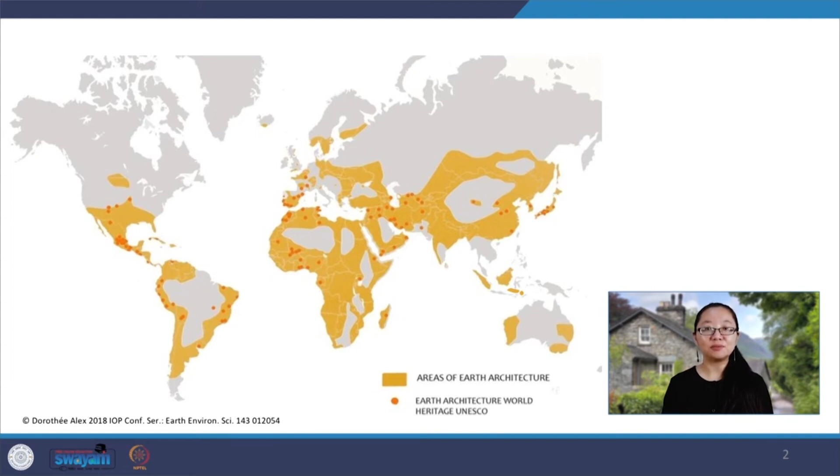When referring to earth or soil in building construction, both terms mean the same materials. Earth has variations of color, texture, and characters depending on the soil content, geography, and climate. As can be seen in the picture, soil in the tropic and desert is different. The World Soil Museum in Wageningen, the Netherlands, showcases 100 earth profiles from more than 90 countries in the world. The display represents the 32 major earth groups and the variation of earth within those groups.

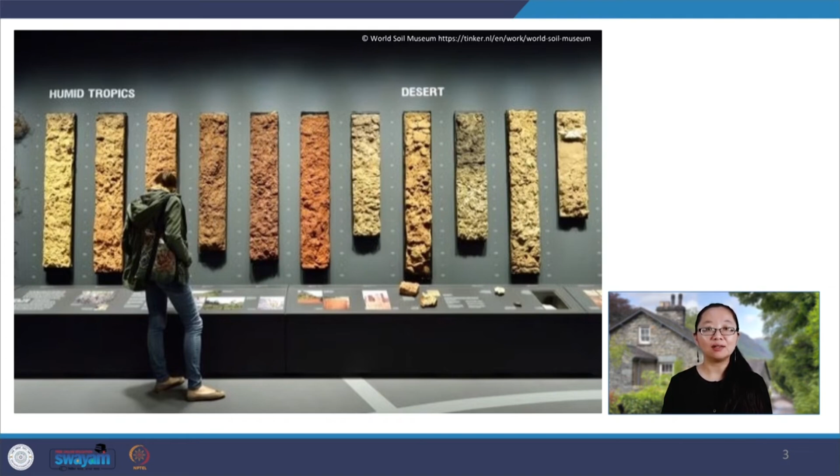Each of these soil groups has different content which affects its color, texture, and characters. Some are softer, stickier, or clayey like mud. Some are harder, rockier, and drier. Based on those different earth qualities, climatic conditions, as well as local knowledge and technique, a variety of techniques are developed. With these techniques, different cultures use earth to create many buildings, not just homes and dwellings, but also religious buildings, fortresses, and palaces that have stood the test of time.

The first construction to be discussed here is the dugout technique, which falls into the monolithic construction where one uses only the soil. Earth is dug out of the ground to create underground shelter. In most cases, this kind of dwelling occurs in zones with arid climate and with soft yellow earth that is easy to dig into, but also has a high capacity to maintain the standing posture and is less prone to collapse even without support. Moreover, the arid climate is in favor of the soil to keep dry and rigid, which improves the service life of earth dwelling architecture.

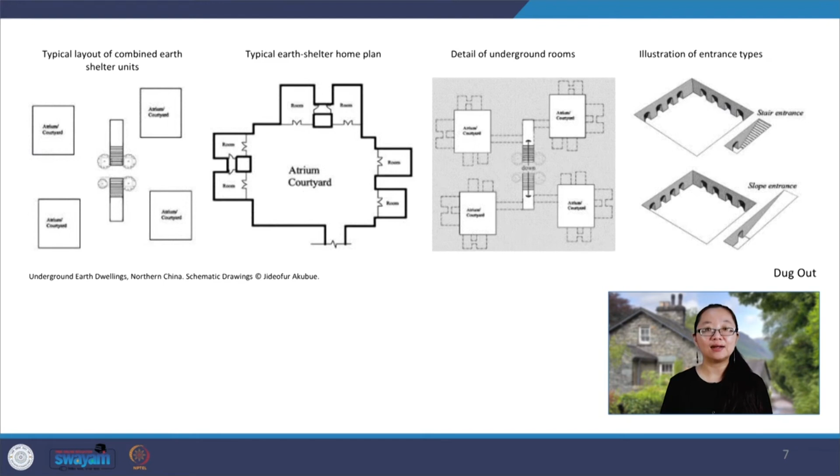The client wants a family home that makes as little impact as possible on the surrounding environment, both visually and environmentally. So the architect responds with a half-buried residence in the contours of the hillside, with a roof of meadow grasses integrating it seamlessly into the surrounding moorland. Designed to consume less energy than it generates, the house generates renewable energy on site, powered by a ground source heat pump, photovoltaic panels, and wind turbine. While it's far from a traditional home, the architect proposed to build it with traditional construction methods and locally sourced materials. The structure has already been selected as an exemplary project within the UK government's Planning Performance Agreement for renewable and low carbon energy schemes.

The second one is rammed earth technique, which also belongs to monolithic construction. This technique is basically making use of simple tools to compact soil in order to produce rock-hard structure. The construction of rammed earth includes aggregate portions of silts, sand, and clay, and adding this mixture to the soil.

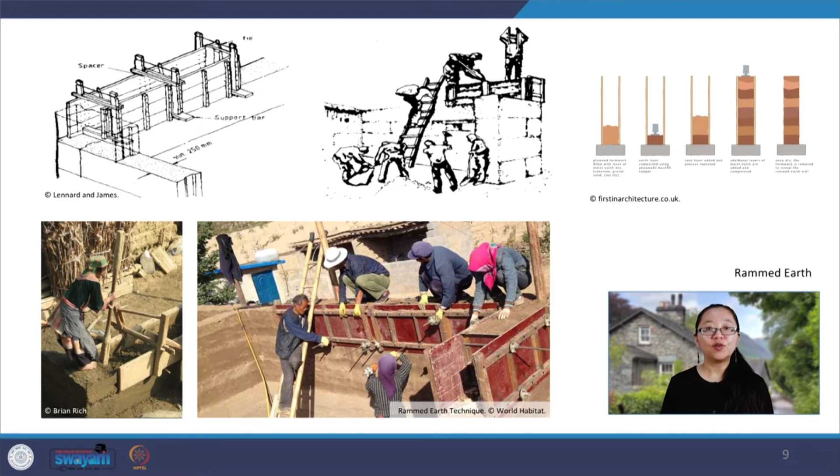Because of the layered construction, rammed earth walls are characterized by a horizontal strip pattern, and by using different colored soil, this effect can deliberately be emphasized. Such rammed earth walls function as structure and can be extremely durable. The walls are built in a more damp and humid climate. It is used widely in countries as far apart as France, Spain, Morocco, Chile, Mexico, India, and China.

One of the oldest, biggest, and the best preserved rammed earth buildings found is the Castillo de Baños, built in 968 AD. The fort was originally built by the Andalusians. It is one of the oldest castles in Spain and the second oldest in Europe. It is also known as Burgalimar Castle and Fortress of the Seven Kings. The fortress is a rammed earth fortified complex, an oval shape with over 100 meters in length, with a crenellated wall studded with 14 square turrets and one large tower.

The other earth building in Europe shown here is the rammed earth houses in southern France. It is believed that the construction spread to France by the Romans through the Rhone River Valley, where they built the capital city of Gaul, which is called Lyon today. In the city of Lyon, there is substantial evidence of agricultural buildings and houses made of rammed earth that are still visible today.

Another rammed earth building still occupied until today is the Tulou, a Hakka tribe rural dwelling in the mountainous areas in southeastern Fujian, China. They are mostly built between the 12th and 20th century. A Tulou is usually a large, enclosed, and fortified earth building, most commonly rectangular or circular in configuration, 3 to 5 stories high, and can house up to 800 people.

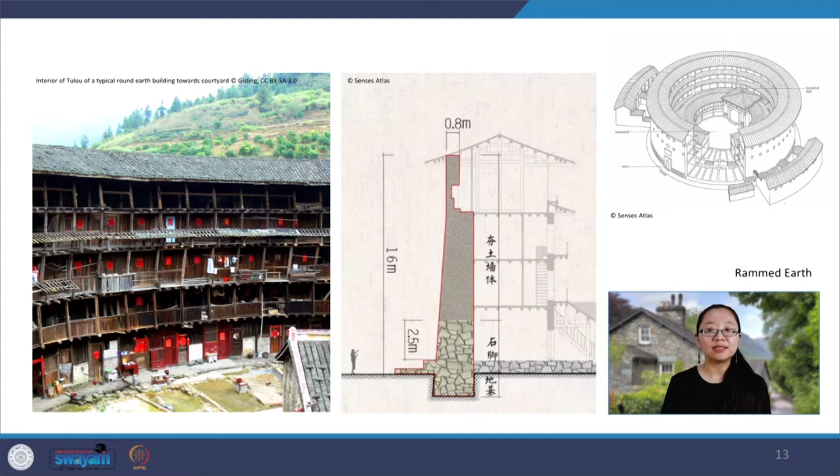Another old but still standing is the rammed earth buildings in the Spiti River Valley, Lahaul in Himachal Pradesh, India. The region is a desert area, and like many desert areas, it has very hot days and chilling nights. Precipitation usually only occurs in the form of snowfall, with almost no to very little rainfall. With that climatic condition, timber is scarce, so mud is the main locally available construction material. Therefore, the buildings here are made of rammed earth walls.

Timber is solely used for floors and roofs, as well as for door and window frames. Natural stones are also scarce and thus only used for foundations. This construction type is predominantly used for residential houses and temples, and it has been practiced for more than 200 years until today.

There are many more great historic examples of rammed earth still standing today, a testament to the durability and strength of this technique, and clearly one of the reasons it has been accepted by the modern construction industry as a legitimate building construction technique. The contemporary architecture shown here is the Nk'Mip Desert Cultural Centre in Canada, designed by Dialog, built in 2006. The architect stated that the project is designed to be a specific and sustainable response to the building's unique Canadian desert, found in the south Okanagan Valley in British Columbia.

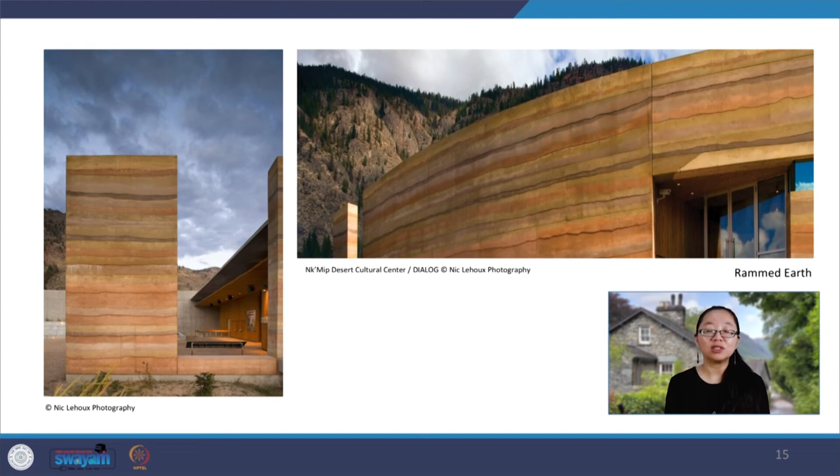The third technique is the earth sheltered space. It is a traditional technique, but nowadays commonly referred to as green roof. For thousands of years in arid climates, earth has been traditionally used to cover roofs.

It acts as a thermal mass regulating the inside temperature. Earth naturally absorbs heat and retains it before gradually releasing it into its surroundings. And due to the high density of earth, each change in temperature occurs slowly in what is known as thermal lag, resulting in a fairly constant temperature compared to the fluctuation experienced outside.

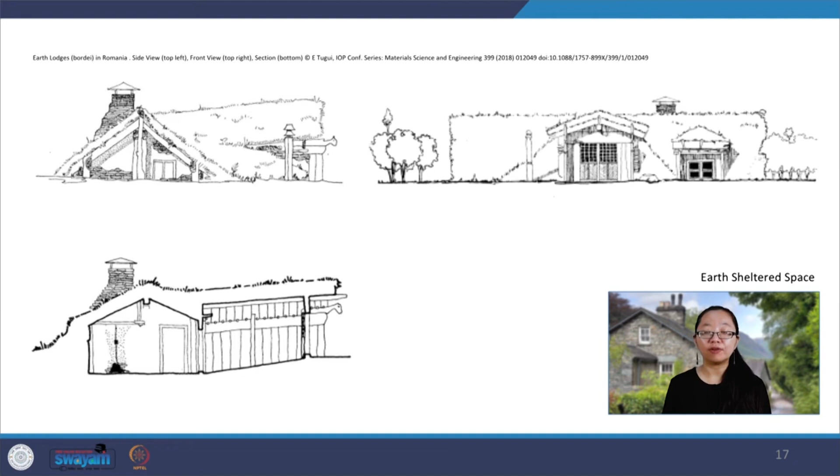The building was covered with a thick layer of earth. The interior level was generally at 1 meter below ground. The walls were either wood or stone and covered with a layer of clay to create a flat surface.

Earth shelters are also naturally soundproof, which can be beneficial in noisy urban areas and provide greater privacy from the neighbor. Earth shelters, which sit below the surface, also make efficient use of land, with the possibility for lawns or gardens above. In regions prone to natural disasters such as tornadoes and hurricanes, earth shelters may also cost less to insure, as they are less susceptible to catastrophic damage.

This earth shelter space, or green roof, has been applied to many contemporary building designs, such as this California Academy of Sciences by Renzo Piano. The architect called this green roof a living roof, covered with more than 1.7 million plants planted in especially conceived biodegradable coconut fiber containers. The roof is flat at its perimeter and, like a natural landscape, becomes increasingly undulating as it moves away from the edge to form a series of domes of various sizes.

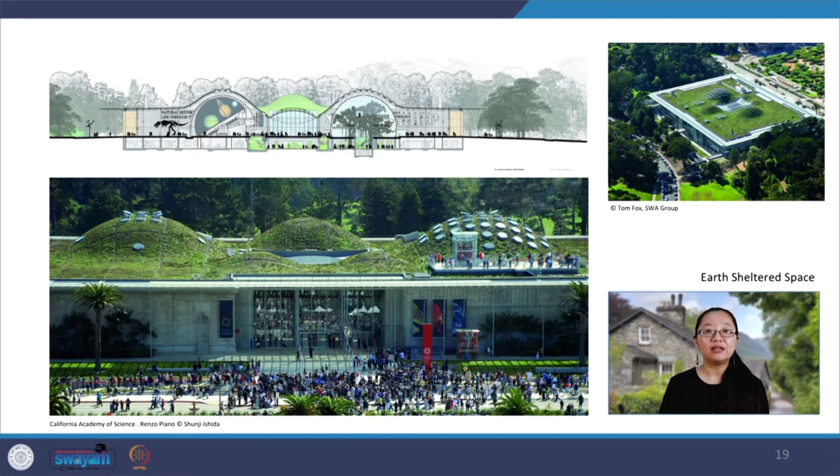The 2 main domes cover the planetarium and rainforest exhibitions. The domes are speckled with a pattern of skylights, automated to open or close for ventilation. The soil moisture and roof openings cool the inside of the museum significantly, thus avoiding the need for air conditioning in the ground floor public areas and the research offices along the facade. The choice of materials, recycling, the positioning of the space with respect to natural lighting, natural ventilation, water usage, rainwater recovery, and energy production has made the museum obtain Green Building LEED Platinum certification.

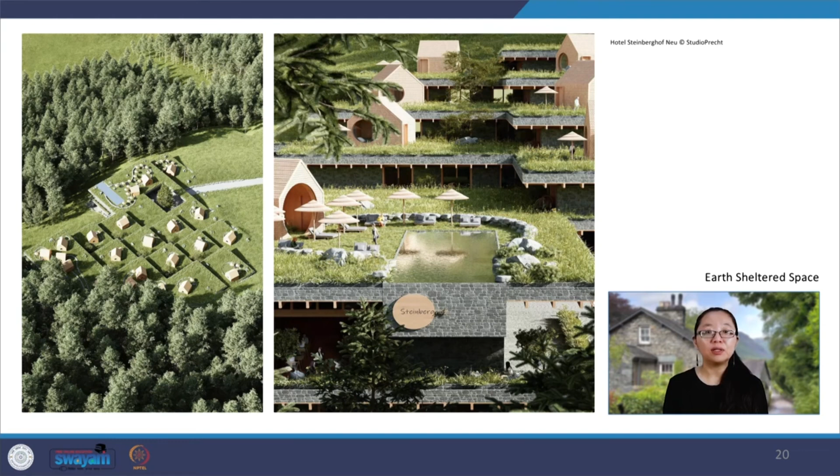Another example of contemporary design of these earth-sheltered spaces is a hotel design proposal in a mountainous area in Austria. Chris Precht, the architect, stated that they envisioned a terrain building that almost hides in its natural surroundings. The levels of the hotel are terracing down with the natural slope. Built with stone, wood, and lots of grass, it takes on the materiality and color of the surroundings. An intensive greening of the roof gives back space to nature and wraps the building in a healthy envelope. Many more green roofs have been applied in contemporary architecture, both to reduce the heat but also to create a more sustainable built environment.

The fourth earth construction technique discussed here is the sun-dried rectangular clay brick, also known as adobe. These adobe bricks are made of thick malleable mud, often with straw added to increase compressive and tensile strength. After being cast, either in a mold or shaped by hand, they are left to dry under the sun in the open air. Normal bricklaying techniques are used with earth or lime mortar. Earth bricks have load-bearing structural properties but provide poorer insulation compared to the dugout, rammed earth, or earth shelter spaces mentioned before.

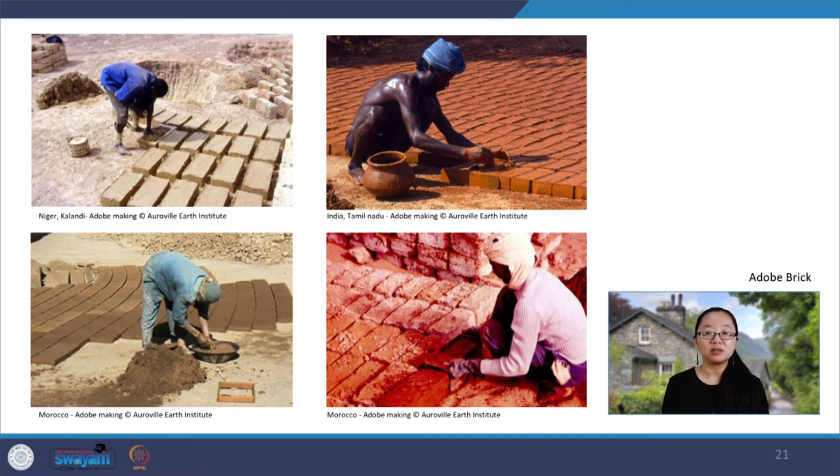There is a huge variety of vernacular buildings worldwide using this adobe brick form. One of the most notable ones are the beehive vernacular houses in Harran, Turkey, which date back to 1750. These houses stay cool in the desert heat, and their thick mud brick adobe walls trap the cool and keep the sun out. The high domes collect the hot air and move it away from the ground floor, keeping the interior around 24 degrees Celsius, while the outside extremes range from 35 to 0 degrees Celsius.

The roof slopes steeply to shed the occasional but heavy rainfall. These houses have resisted the stresses of strong winds and minor shocks from frequent earthquakes since the mid-18th century. The doors and windows are few and small to minimize the sun's glare and the movement of hot and cold air during the day and night. Its floors are slightly raised above the soil outside, spotlessly clean, with a recess for cooking and attractive decorations in bright tinsel paper on the walls. Though only a few yards in diameter, its high conical roof gave it a sense of space.

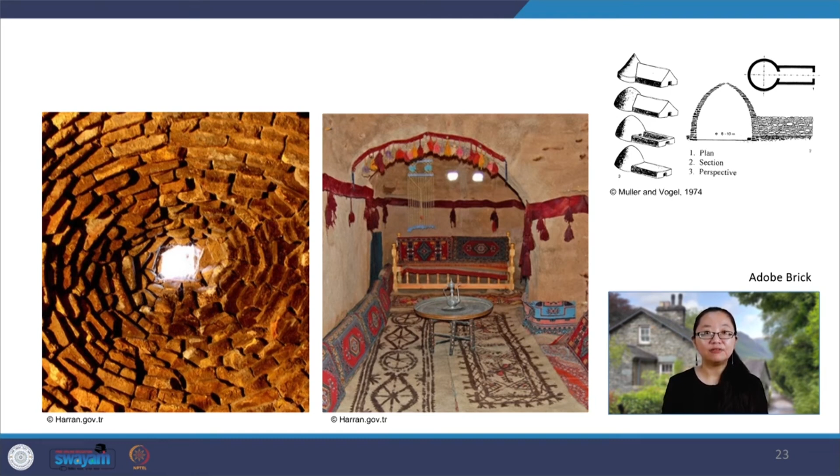Each dome is built with about 1,400 adobe bricks. The pictures show the construction of the dome using brick layered in circles, smaller in diameter toward the top. Naturally built homes like this have been lived in comfortably for thousands of years.

Another example of adobe architecture is the vernacular architecture of the Mossi ethnic group in Burkina Faso. The Mossi live in villages of extended families, parents and children, plus other relatives. The boundary of the village may be a stream or a natural feature, but in general, the village is more a social unit than a geographical one.

A traditional Mossi village consists of a number of round adobe huts with cone-shaped roofs made of thatch. They are surrounded by adobe walls. Each member of the extended family has a hut. Each house of the Mossi people also includes a patio-like area of pounded, swept earth with an awning. People rest there during the day and welcome guests.

In their development, more houses are built in rectangular shapes. The load-bearing walls are built with 15 cm thick adobe brick with an interior clay coating and exterior lime coating. The adobe bricks are manually built on site. Bricks are produced in wooden molds, mixing earth material and water, and sometimes straw is added to limit cracks. The earth mixture is placed in molds and dried in the sun.